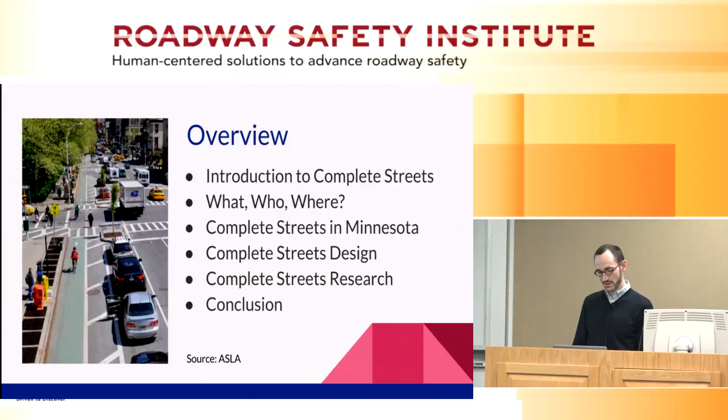So to start off with, some statistics, like statistics we've seen before, about pedestrian and bicycle safety. In the state of Minnesota, in just last year alone, 1,828 pedestrians and cyclists were injured or killed in traffic accidents. And while that only accounts for 0.6% of the total people injured or killed in traffic accidents, the number of people that were severely injured, 158, account for 14% of all the people that were severely injured in traffic accidents. So that 14% is not of the 1,800, it's of the number of people severely injured.

Similarly, the number of pedestrians and cyclists killed in traffic accidents account for 12.4% of the total number of people killed in traffic accidents. So pedestrian and cyclist accidents in Minnesota represent a disproportionately large number of severe injuries and deaths in traffic accidents.

The statistics for the US as a whole are similar. In 2015, there were approximately 135,000 pedestrians and cyclists injured, which again is 0.6% of the total number of people injured in traffic accidents. And again, the number of pedestrians and cyclists killed in these accidents, around 6,000, represents 17.6% of the total number of people killed in traffic accidents.

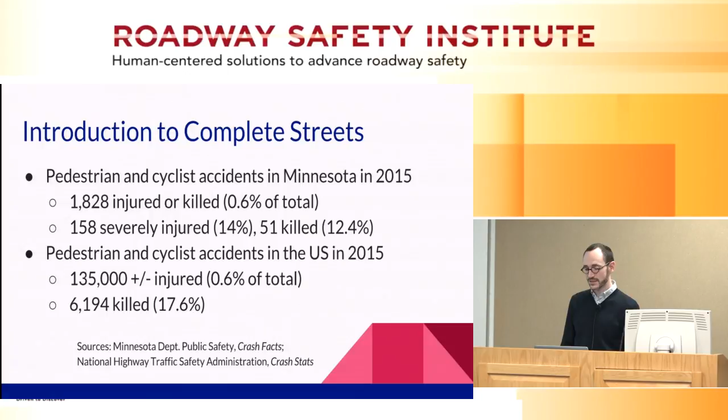So Complete Streets is a movement or a policy program intended to address some of these problems, to make streets safer for pedestrians, cyclists, and everyone who uses the road. The name comes from the idea that most streets in the United States, at least, are incomplete in that they serve primarily the needs of automobile drivers.

Streets are designed to be efficient, to have maximized throughput, to reduce congestion, but they don't necessarily serve the needs of all users. Specifically, they don't necessarily serve the needs of pedestrians, cyclists, or transit users. So Complete Streets is a policy program designed to make streets accessible and safe for users of all ages.

I'm not sure if some of you have heard of the 8 to 80 program. The thinking is that streets should be safe for users from age 8 to 80. It's a policy similar to Complete Streets, and streets should be accessible and safe for users of all ability levels, including children, the elderly, and people with disabilities or impaired mobility.

So Complete Streets is a series of design principles that promote safety, accessibility, and ultimately equity, in that the streets are serving the needs of everyone.

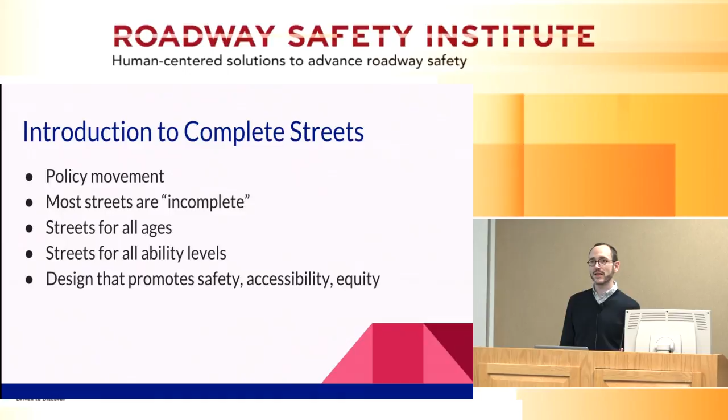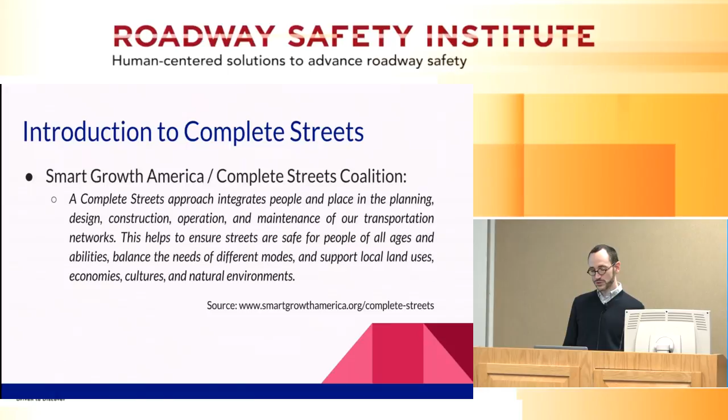Smart Growth America and the Complete Streets Coalition outline the program as follows: a Complete Streets approach integrates people and place in the planning, design, construction, operation, and maintenance of our transportation network. This helps ensure streets are safe for people of all ages and abilities, balance the needs of different modes, and support local land uses, economies, cultures, and natural environments.

Similarly, the Complete Streets policy statement for Hennepin County states that the Complete Streets policy helps the county improve safety, mobility, accessibility, and convenience for all road users; plan, design, operate, and maintain a network of roads that serve buses, bicyclists, and pedestrians, as well as cars and commercial traffic; and increase opportunities for people to be physically active through walking and bicycling.

One thing to note with these objective statements is that safety is at the top of the list of what the Complete Streets program is all about, but it's not the only goal.

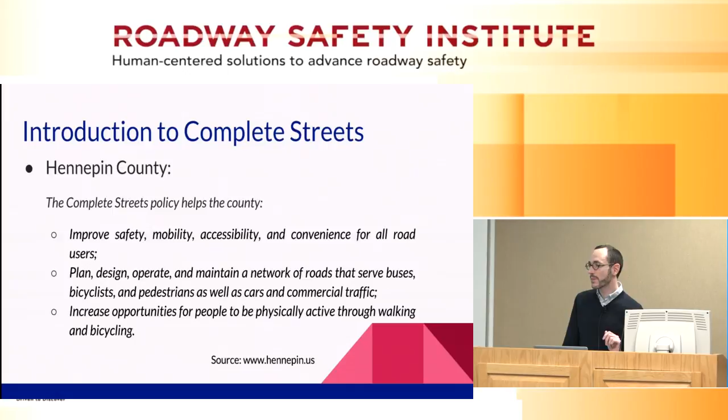A couple other things to note about Complete Streets: as a program, it doesn't bill itself as a revolution in street design. It's rather a sort of return to older practices of street design that allowed space for pedestrians and users of other modes. Similarly, it's not a one-size-fits-all prescription for every street.

What complete means can vary by context. A complete street or a complete rural route wouldn't necessarily include the same sidewalk infrastructure or the same bike infrastructure as a residential downtown street.

It does not mean all modes on all roads. It doesn't suggest that every road needs to serve transit, bicycles, and pedestrians, but rather that there should be an integrated network that's equally accessible to all users.

In this photograph, you can see an example of what some complete street design features look like. We see somebody crossing at a crosswalk. Where the crosswalk is, the curb extends to shorten the crossing space. The curb extension, or bump out, is a common feature of Complete Streets policies. And you can see that there's a yield sign as well.

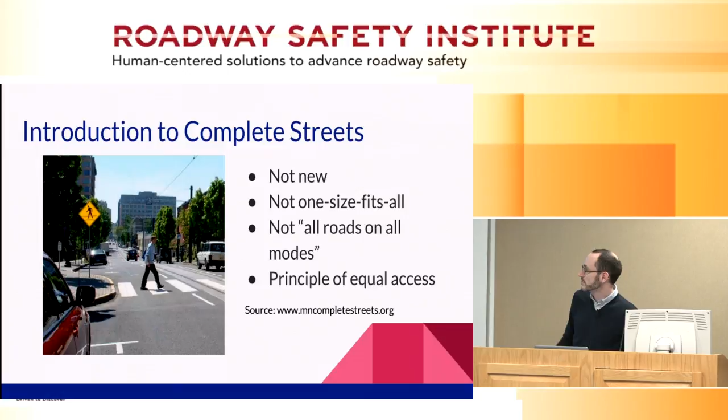So I've been saying that Complete Streets is a program, a policy program, but what exactly does that mean? Mostly it means that it's a series of policies enacted at the state and local level. I think currently over 700 county and city governments across the country have enacted some form of Complete Streets policy.

These policies state that streets should be designed taking into account the needs of not just drivers, but also cyclists and pedestrians. In a more practical sense, that means there are a series of design guidelines that guide what kinds of street furniture are included in street designs, how intersections are laid out, and the placement of bike lanes, sidewalks, landscaping, and other features.

Common features include curb extensions, like we just saw, crosswalks, median islands to make it easier and safer for people to get across the street, as well as bike lanes, sidewalks, and landscaping.

And in most cases, this doesn't mean a sudden sweeping away of current streets and replacing them with more carefully designed streets, but rather it tends to follow a slow rollout. Every time a city government needs to do a retrofitting project or upgrade its street, the policy will kick in to make it so that the needs of all users are incorporated in the redesign.

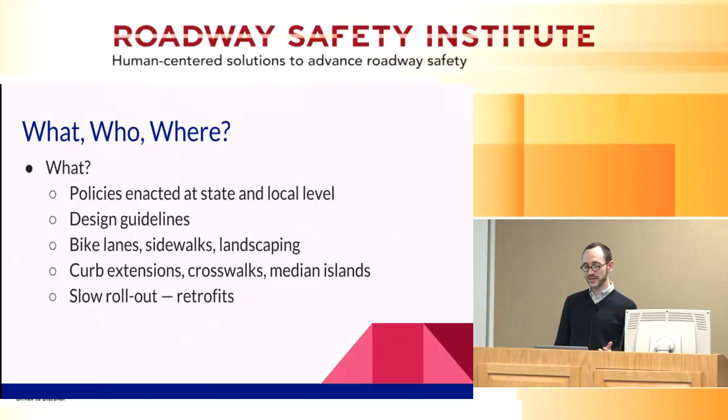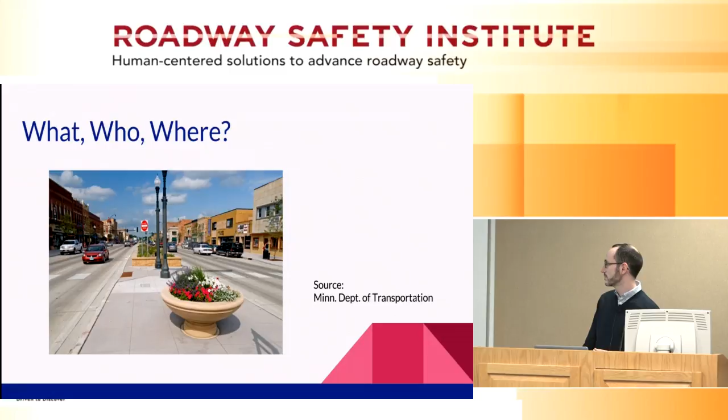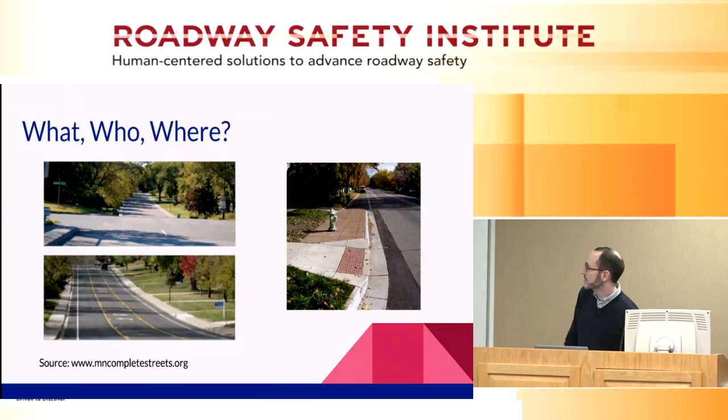So who's behind this? It's both a grassroots movement in that it's organically happening across the country, but it's also a sponsored program. The people behind it are the Complete Streets Coalition, founded in 2004 by bicycle advocates who wanted to make the streets safer for bikes, and then expanded to be a more encompassing program. The Complete Streets Coalition joined and became part of Smart Growth America in 2012.

Smart Growth America is a DC-based nonprofit that promotes several different smart growth initiatives, of which Complete Streets is one. And they have set up chapters in different states. Minnesota has a Complete Streets chapter, as do other states, and they provide support for how to incorporate Complete Streets policies into local statutes and legislation, as well as a resource center for people interested in advocating for this.

So there are nearly 1,000 policies at city, county, and state level across the United States. And most recently, in 2015, Complete Streets got support from the federal FAST Act, which was the most recent transportation bill. Can't quite remember what the acronym is right now.

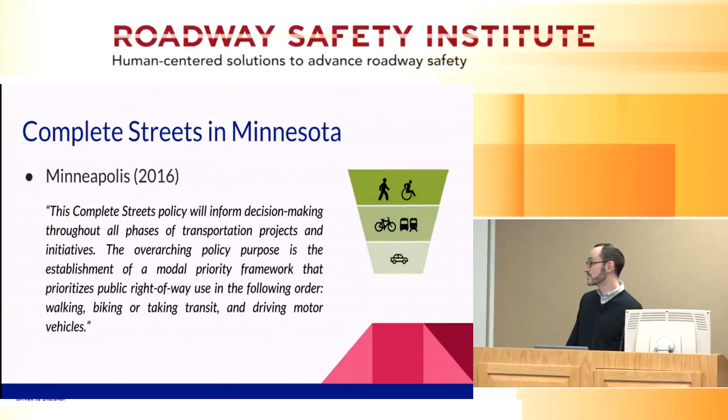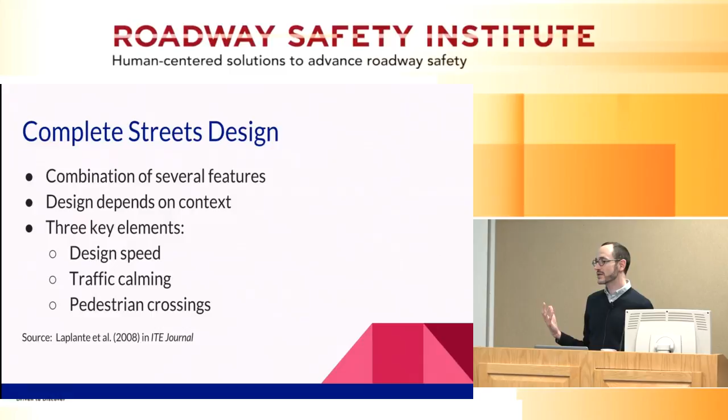Next, we're going to talk about what actually complete streets design looks like on the ground level. And Jason's going to explain how this policy tool gets translated into reality on the street level.

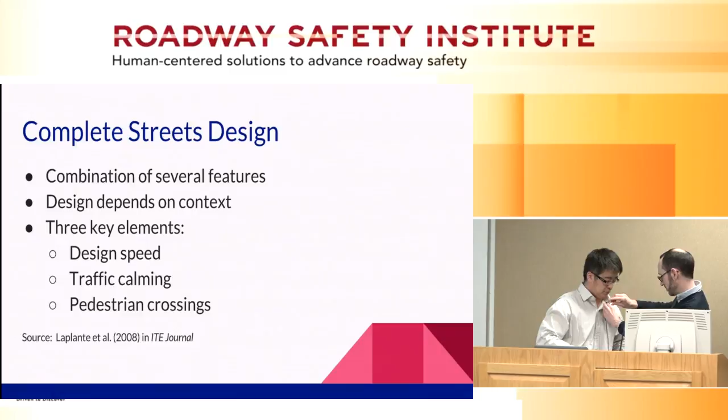Okay, I will continue, and according to Alan, you can see the complete street design includes several features, and this is not a one-size-fits-all approach, it depends on the local context. But according to a paper published in ITE Journal by LaPlante and colleagues, the complete street design includes three components: design speed, traffic calming, and pedestrian crossing. Now I'm going to introduce you to them one by one.

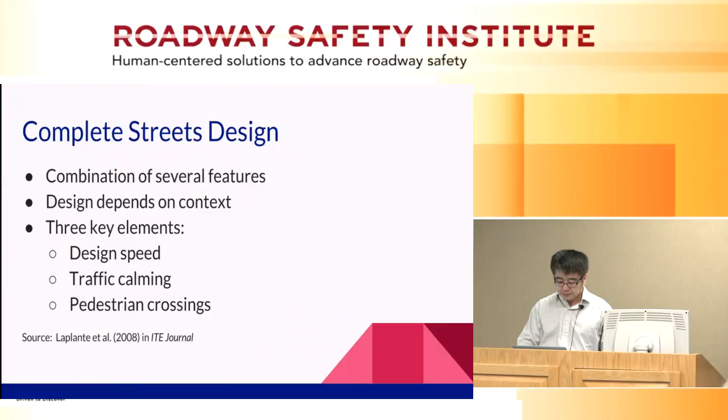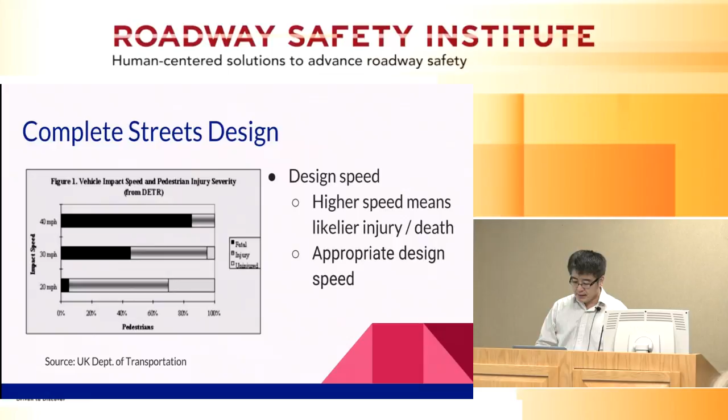And then the traffic calming, and traffic calming includes many dimensions. Here I just give you a few examples. The first one is narrow lanes. Currently our road network, the road is about 12 feet. Research shows if we reduce the road width from 12 feet to 11 feet and even 10 feet, if we travel at 45 miles per hour or less, it's still very safe. So we could narrow the lane.

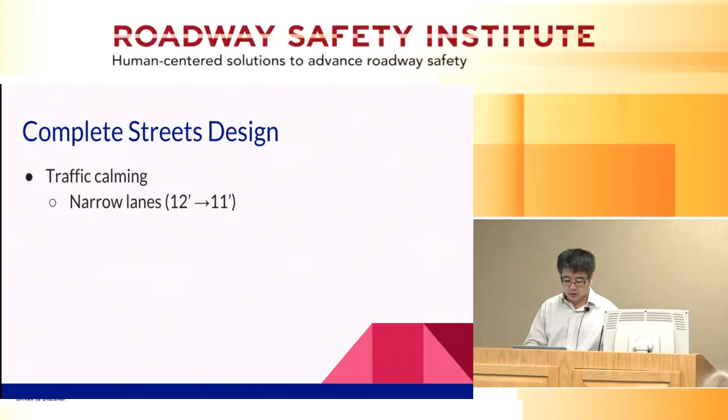So in that case, we can reduce the pedestrian walking distance. This one shows an example of a road that commonly you will see, we have a road and 4 lanes, 2 lanes each direction. In this case, we are going to convert the 4 lanes into 3 lanes, one lane each direction, and the middle part is called a turning lane. Also, we can save some space for bike lanes.

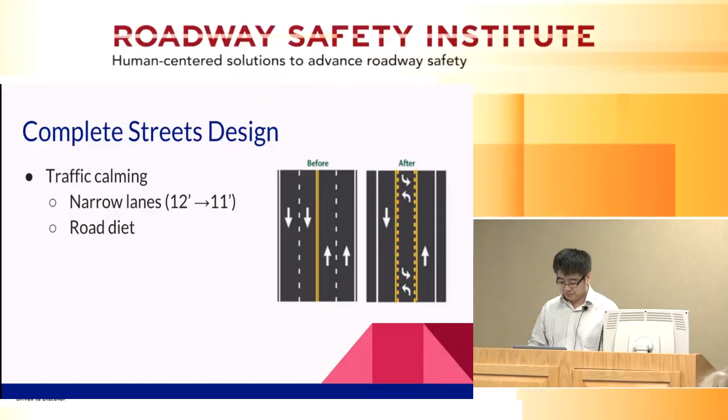This one shows the curb radius. If you look at the bottom one, you can see it's very wide, the turning radius. Actually, it has 2 consequences. One is, because the corner is kind of curved, for the right turning traffic it's very smooth for the cars to move at a higher speed. But on the other hand, because of the wider radius, the pedestrian needs to walk more distance compared to the first one, which has a very narrow radius, and the bottom one is the very wide radius. So you can see the difference.

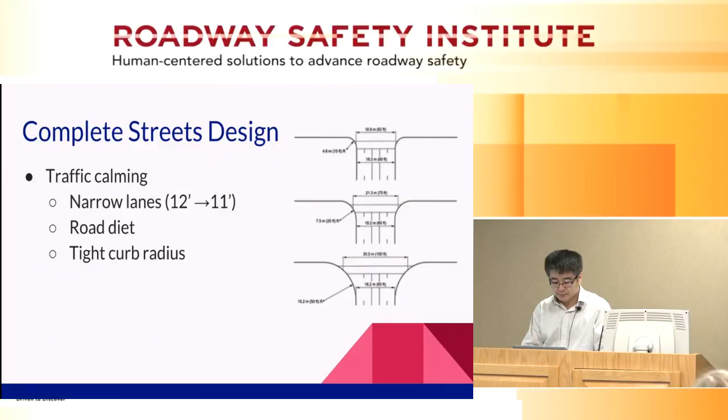Also, in current roadway design, you can see we have this kind of free flow right turning lanes. In that case, the cars do not need to stop, and as long as it's safe to yield, they can move at a pretty faster speed, going through this turn, and that actually increases the probability of crashes. But if you use the right figure, because this is a right angle turn, the car needs to stop there, watch the traffic, and make a turn slowly. So in that case, it can reduce the occurrence and also the severity of pedestrian crashes.

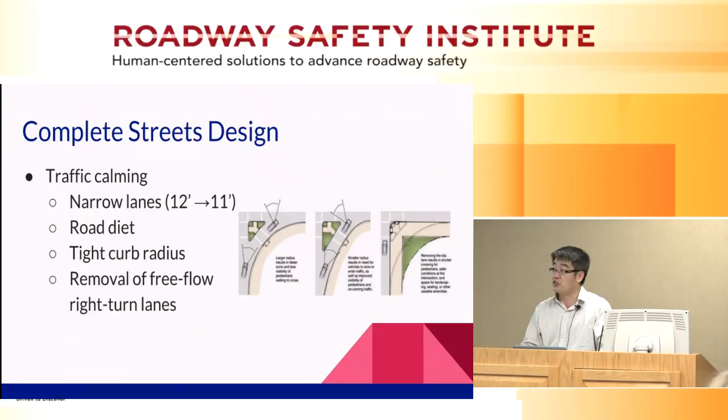And this figure shows the raised median. When you see the raised median, and if you have landscape, in that case the road appears narrower, even though it's still 12 feet. So in that case, they can slow down the traffic and reduce the crashes.

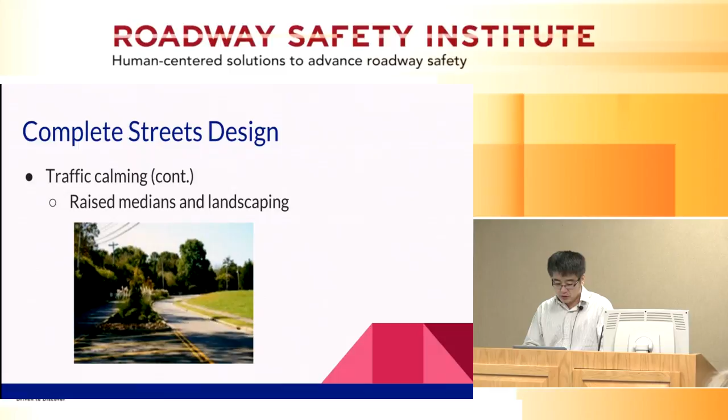And this one is called a bump out or curb extension. It has two major effects. One is, because the curb is out, the car drivers can easily identify the pedestrians waiting at the sidewalk. And also, because of this curb extension, the pedestrians just need to walk a very short distance to cross the street. So that's going to reduce the crashes.

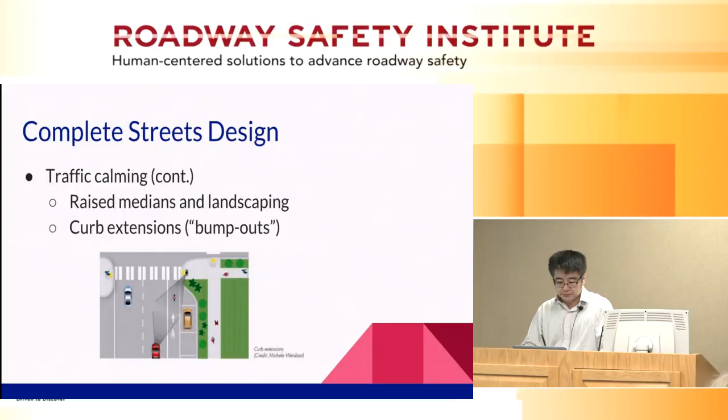Now I'm going to talk about the pedestrian crossing. All of the features we just talked about have implications for the pedestrian crossing. It's very important that we can provide crosswalks and warning signs, to give the drivers warning. So possibly you will see the pedestrian coming in front of you, and that's going to help them be alert and reduce their speed.

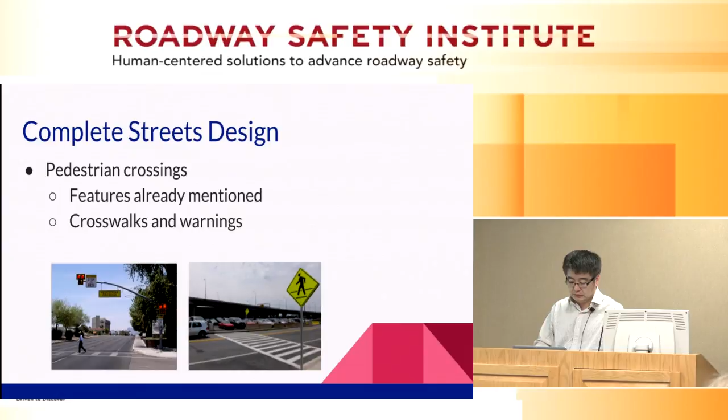And sometimes, at this kind of corner, if this right turning corner has to be like this way, it's better that we can provide an island instead of just having a wide curb radius. So at least this refuge island is going to help the pedestrian wait for traffic.

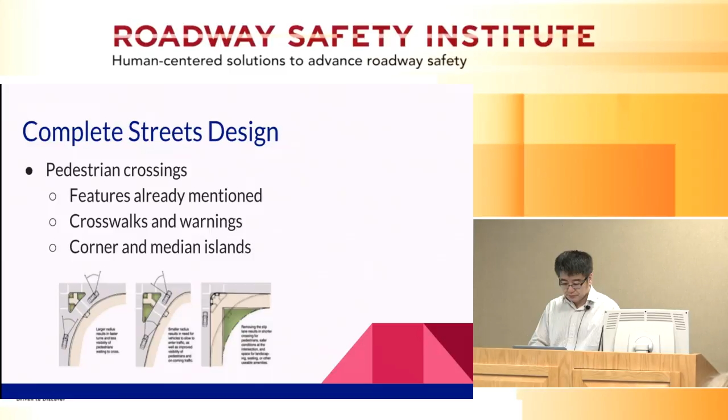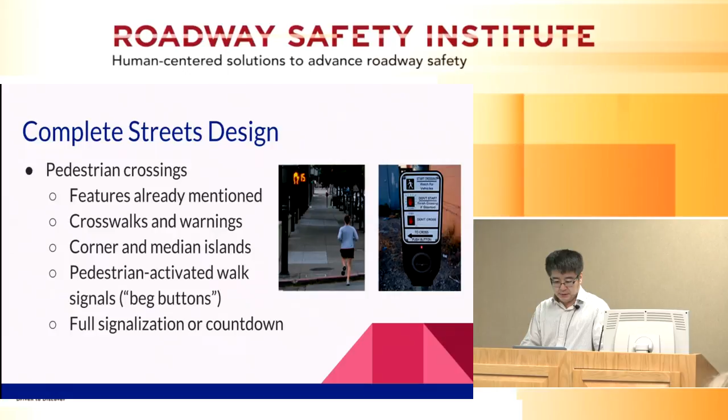And then, this is kind of commonly seen, the push buttons and also full signalization and countdown. So in that case, it gives a phase for the pedestrian to cross the street. So those are the features of the complete street design.

And then how about the research? There is a lot of research trying to understand the connection between, broadly, the built environment and pedestrian safety. I use the information from a paper published in the Journal of Planning Literature, by Stoker and colleagues. They talk about the connections between the built environment and pedestrian friendliness, dividing the built environment into three components: regional, local, and street level. For the regional level, they are really talking about density. In general, when we see density increase, the number of crashes increases. The reason is, when you see density, you see more activities, and more activity means more crashes.

And then the second one is the regional development. In general, you will see more crashes in the urban area, also because of more activities. But in terms of severity, the rural area tends to be fatal.

And then the next one is regarding the urban sprawl. This is really similar to the rural setting, and you will see more severe crashes at the sprawling region.

Now we are going to move down to the local level. For the local level, we have two major characteristics: one is the pedestrian infrastructure, and the other is roadway design. For street level, we have visibility, traffic volume, and traffic speed. All of these will contribute to the risk of the built environment, and it also depends on the traffic. If we see more pedestrian traffic, that's going to increase the number and also the severity of crashes.

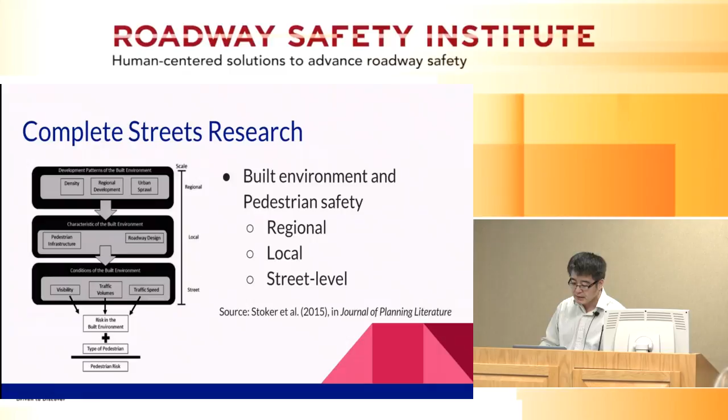In terms of the pedestrian infrastructure, it includes two major components. The first one is about the separation from the traffic. In general, the greater separation from the traffic, the safer. So for example, if we have sidewalks, that's separate from the general traffic, and also marked crossings, and over and underpasses. That's going to save the pedestrian from crashes.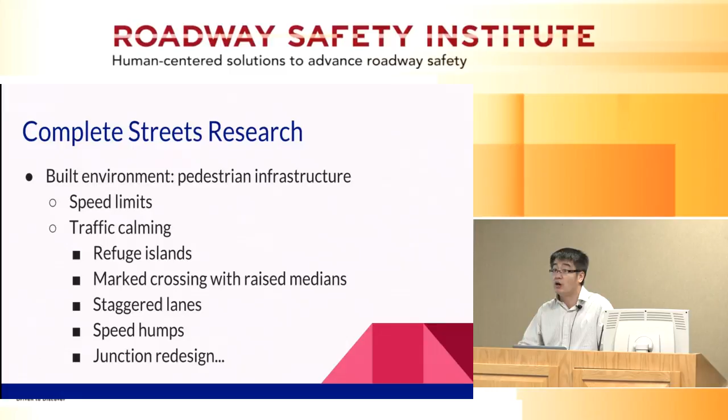The second one, in terms of the pedestrian infrastructure, is the speed limit. So we can reduce the speed limit, and in that case, the vehicle travels slower, and that's going to benefit the pedestrian. When you see the traffic coming, those measures are going to help the pedestrian for road crossing. In particular, they talk about refuge islands, marked crossing with raised medians, staggered lanes, speed humps, and junction redesign.

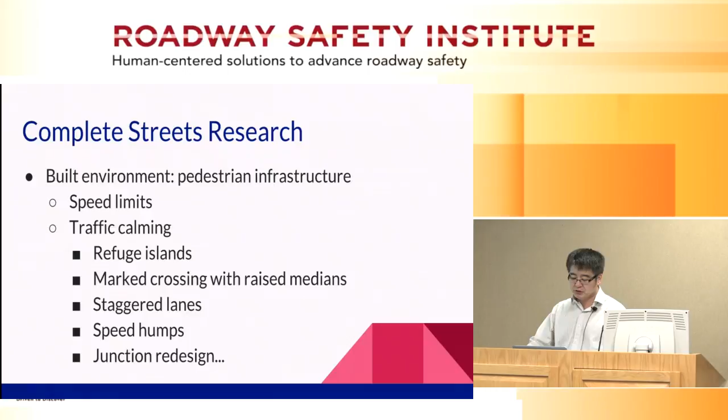In terms of the roadway design, the general conclusion is: the narrower the road, the safer. And if we widen the road, that's going to increase the occurrence and also the severity of the crashes. Of course, if we see speed reduction, that's going to help the pedestrians.

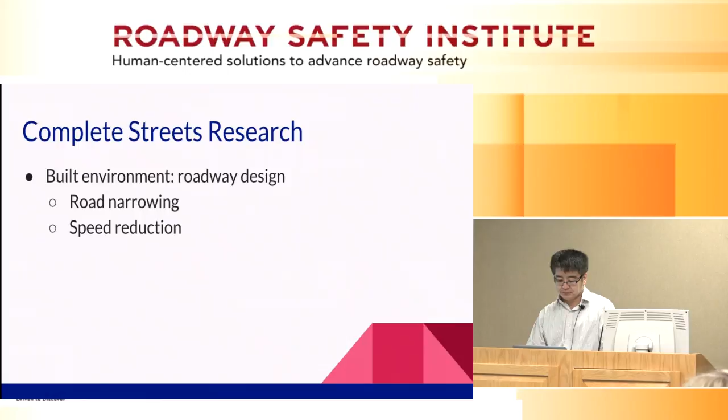In terms of street level, the first dimension is about the traffic volume. If you see more traffic, then more crashes. Just like vehicle safety, more VMT means more crashes—that's reasonable. And also the traffic speed: the higher the speed, the more crashes.

Another important thing is visibility. If you are a driver at night, it's very difficult to see the pedestrians. That's the reason the literature says at twilight and nighttime you see more crashes. Also, if the street has low lighting, that's going to create a lot of crashes. So this is something about visibility.

All of this research may or may not have a connection with complete streets. This is safety research trying to see the connections between the built environment and crashes. So it does not have to have any connection with complete streets.

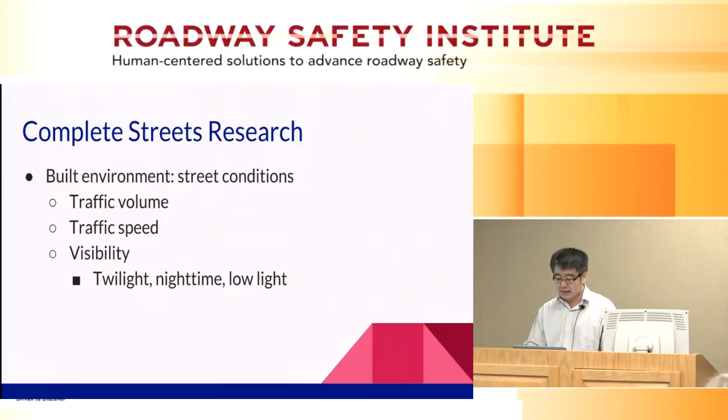Fortunately, we do find out—let me move a little bit faster. When we look at the complete street program, based on this literature, we can see the following strategies seem promising in preventing pedestrian crashes: road diets, pedestrian lanes, sidewalks, crosswalks, bump outs, speed humps, and lighting. In terms of safety campaigns, this is not that effective, as I said, since it may not have any connection with complete streets.

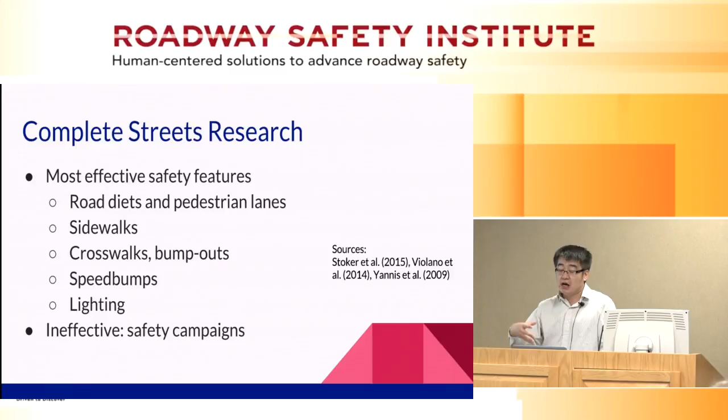Fortunately, we do have one research conducted recently that tries to compare before and after: before the implementation of the complete street program they have a count of crashes, and after that they do another count. So they want to see whether or not the complete street program is successful.

But their argument is, because we implement these complete streets, more people are using the road. So that means you see more pedestrians on the street. And even though we see the number of crashes increase, relatively, the crashes per person decreases.

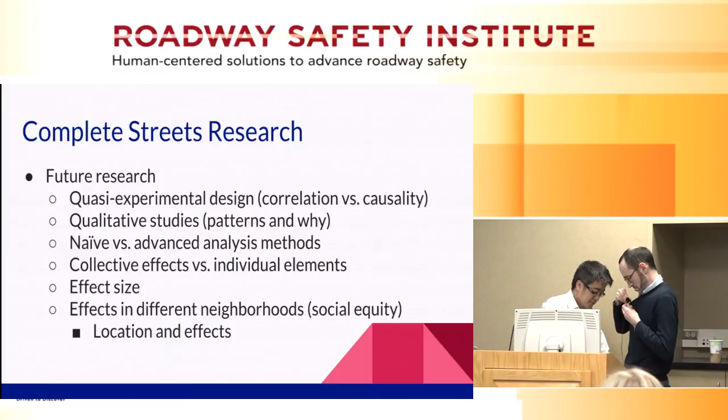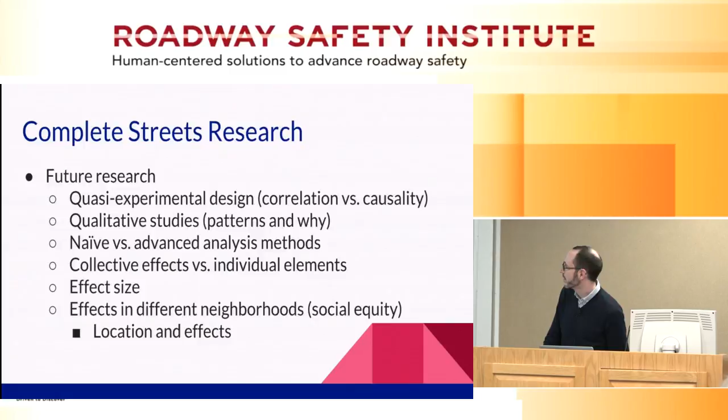So just to finish, we're going to talk a little bit about some conclusions we can draw and some possible criticisms of the Complete Streets program. First of all, it should be said that it's a very promising policy movement in that it's recognizing that streets are not just for cars, but should also serve the needs of cyclists, pedestrians, and transit users.

There are a couple criticisms one could point out, however, with Complete Streets. One of them gets to what Jason was just saying. There are a lot of questions about the actual efficacy of this approach. A lot of it is based on common sense solutions to traffic safety problems, but more data is needed to back them up. Second, often what Complete Streets policies consist of are vague statements of the need to serve all users, rather than really specific.

Well, there's always a gap between the somewhat vague policy language and the actual realities of what these policies mean on the street level. So in theory, at least, it would be easy for a transit planner who was disinclined to serve the needs of cyclists to check off a box that a road is serving cyclists because there are some sharrows painted every once in a while along the street. So there are some implementation questions. These are probably not solvable because Complete Streets is by necessity a very flexible, very context-specific program.

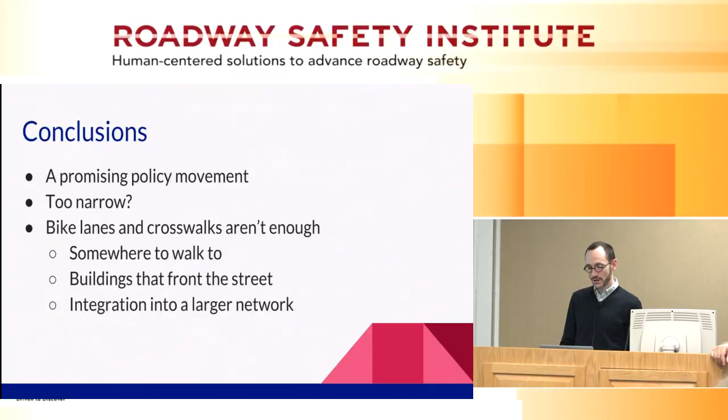But as we've said before, the complete streets policies do promote proven safety features. Most of the research we looked at is about those safety features, and there seems to be strong evidence that individually, at least, crosswalks, curb extensions, and other landscape features do have safety effects. So a policy that promotes these safety features is most likely a good policy. Nevertheless, as Jason said, more research is needed to actually demonstrate the link between the policy itself and the ultimate safety outcomes.

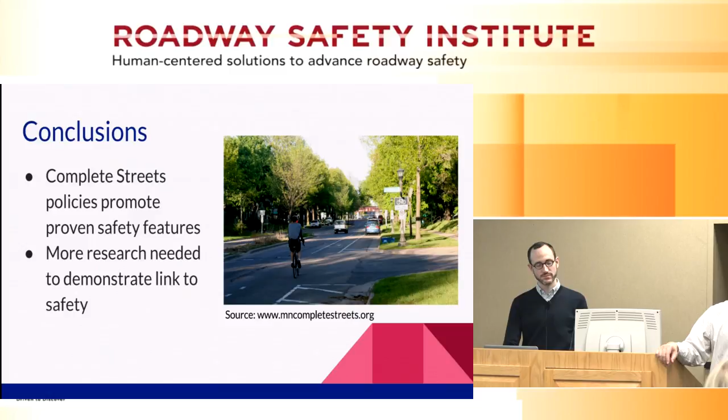So speed is an important part of making this effective. I'm wondering, is there much in the policy about what role enforcement has in getting people to comply with the speed limit, or is the focus on really making spaces that appear to afford certain speeds? I'm just curious about the enforcement side of it.

Yeah, in the literature that we've looked at, there is not really much of an emphasis at all on enforcement of speed laws. It's really about design guidelines. So there is a lot of research saying, for example, that curb extensions at an intersection send cues to drivers to slow down, and that's more effective than having a speed limit posted. So it's really approaching the issue of speed not from an enforcement standpoint, but from a design guideline standpoint.

Yeah, so that's the reason actually, when they see the roadway design, when we do the traffic calming, and actually,

you can see. Oh, Jason. Oh. You gotta take the microphone. No, that's okay. You can just.

Okay, actually, you can see, when we do the roadway design, this is kind of the roadway, right? So this is the standard roadway. So instead of just having all the same lines all the way, you can see they can just put something here. So when the cars are approaching and see this part is narrowing, that's going to reduce the speed, because even though it's the same length, people feel it's getting narrower, and people tend to slow down. And also, if we can have speed humps, that's going to reduce the speed. So it's more from the design than from the enforcement.